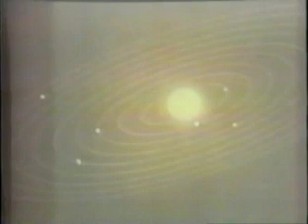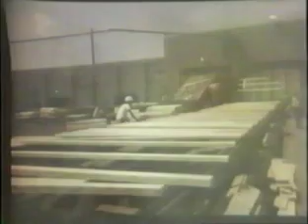Within the universe, we live in isolation. All space beyond the limits of this tiny planet is hostile to man. Apart from sunlight, we receive no help from outside. Unless we tap resources on other planets, we must make do with what we have in the world. And some of our resources, once used, cannot be renewed. We can cut trees for lumber, for paper, or for energy as firewood, and then reforest and cut again. But every lump of coal, every drop of oil, every puff of gas once burned is lost forever.

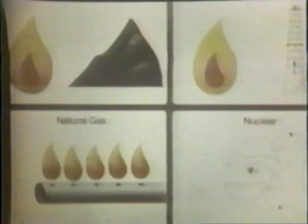Coal, oil, and gas, these are the traditional sources of energy, the so-called fossil fuels, and our isolated little planet contains only a limited amount of each. So far in our use of these fuels, it must be admitted that society has followed a deliberate policy of waste, a policy of maximum consumption, regardless of necessity, efficiency, or national priorities, a policy dictated by comfort, taste, profit, and expediency. We have become a throwaway society.

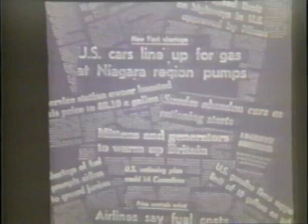Now the first signs of our foolishness, the first signs of the approaching depletion of these valuable resources are making themselves apparent. The headlines you see, you have also seen in newspapers: shortages, rationing, skyrocketing prices, Sunday driving bans, lower speed limits, lower thermostat settings, and so on.

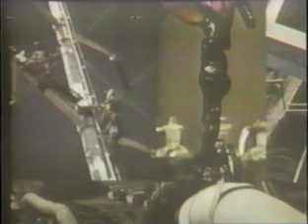What is the answer to the dilemma? Energy is woven through the whole fabric of our society. We cannot get along without it. What then will supply energy in the future in quantities at least as large as at present for the developed nations, and in much larger quantities for underdeveloped countries? Only one alternative source of energy has demonstrated that capability: nuclear power.

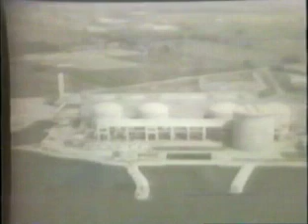That is the Pickering Nuclear Power Station. In capability, it's one of the world's largest. In terms of production, efficiency, and reliability, it is number one, and it is Canadian-designed, built and operated by Canadians, and serving Canadian electrical needs.

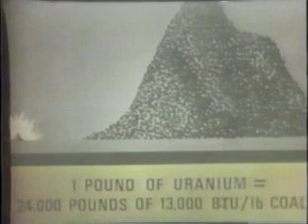To duplicate its output during 1973 with power from a fossil fuel station would have required 7.5 million tons of coal, or 1.1 billion gallons of oil, or 194 billion cubic feet of gas, because 1 pound of uranium fuel is equivalent to 24,000 pounds, or 12 tons, of coal.

Most Canadians have heard of the resounding success of Pickering, but because of its recent and sudden prominence in the news, some may have assumed that Canada is a relatively new arrival on the international nuclear scene. But that's not so. From the earliest days of nuclear development in the United States, Europe, and the United Kingdom, Canada has been involved. Ernest Rutherford, one of the fathers of modern-day nuclear physics, did much of his work at McGill University in Montreal during the early 1900s.

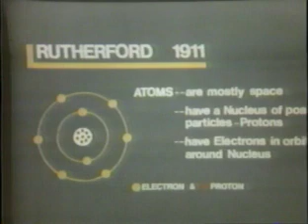He discovered many of the basic properties of radioactive elements, first postulated the structure of the atom as we know it today, and drew attention to, as he put it, the enormous amount of energy which could be obtained from a small amount of matter.

Later, during World War II, a nuclear research establishment was founded at Chalk River, Ontario. Its primary function was to carry on investigations, begun earlier in France, of nuclear reactions using natural uranium with a heavy water moderator. At the same time, a small plant was set up in Trail, British Columbia, to produce heavy water. During these war years, the first reactor in the world began operation in Chicago on December 2nd, 1942.

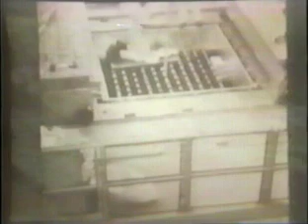Canada was the world's second nation to own and operate a nuclear reactor when the ZEEP reactor at Chalk River achieved a controlled chain reaction on September 5, 1945.

After the war, the research at Chalk River, still concentrating on the combination of natural uranium and heavy water, continued under the direction of the National Research Council until the newly formed Atomic Energy of Canada Limited took over in 1952.

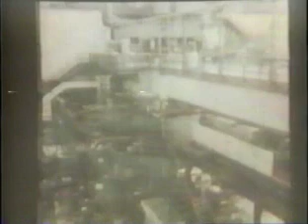ZEEP was followed by two additional research reactors at Chalk River, the NRX, which began operation in 1947, and the NRU in 1957. But for Canada, 1954 was a major turning point.

In that year, a decision was made to explore the possibility of using this new technology for the production of electricity. From that decision, we progressed to the demonstration plant, NPD, started up in 1962, to the prototype station, Douglas Point, in 1967, and to the large commercial Pickering plant in the 1970s. Each station 10 times the size of its predecessor.

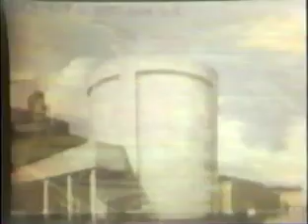Also brought online in the early 1970s was the Gentilly plant in Quebec, a prototype of another variant of the Canadian nuclear system, termed CANDU, for Canada Deuterium Uranium. Today in Canada there are 7 CANDU power reactors in operation and 19 others under construction or planned. All 26 reactors are centralized at 7 locations, and their combined electrical output would be equivalent to Canada's entire generating capability in 1955.

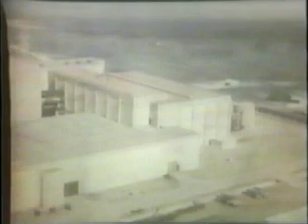Abroad, 2 research reactors and 5 power reactors have been sold, and all but 3 of the power reactors are now in operation. For many people, nuclear power, although an accepted reality, remains shrouded in mystery.

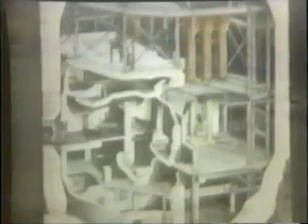A CANDU nuclear reactor is simply a type of furnace used to produce the high-pressure steam that rotates the turbine in windmill fashion and drives the generator to produce electricity. The fuel is natural uranium.

Unlike a coal, oil, or gas furnace, the heat does not come from the process of combustion. It comes from fission and is generated within the uranium itself by the continuous splitting of atoms, which raises the temperature of the fuel as high as 3,600 degrees Fahrenheit.

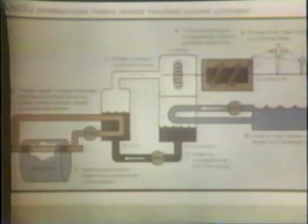An atom of any material, including uranium, is composed of a core or nucleus made up of a specific combination of protons and neutrons, around which a number of electrons move in an orbiting pattern, much as the planets move around the sun. When a uranium atom is struck by a free neutron, it splits into pieces which fly apart with great energy and create heat in collision with neighboring atoms.

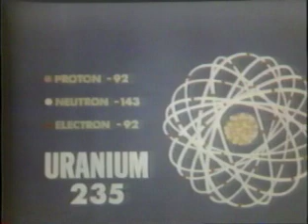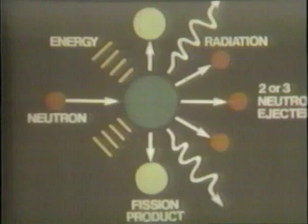Also at this moment of fission, radiation is given off and 2 or 3 free neutrons are released. In natural uranium, there is a small amount of spontaneous fissioning going on all the time, and from this natural process come the initial neutrons required to start the chain reaction.

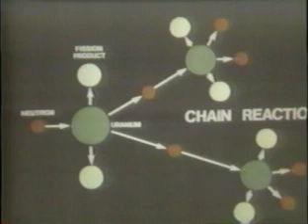The reason why the chain reaction occurs only when the fuel is in the reactor is because the reactor contains another essential ingredient, the moderator. As the 2 or 3 free neutrons are ejected from the splitting atom, they travel at great speed.

Much as a bullet must be slowed down before it will shatter rather than just make a hole in a pane of glass, so the neutron speed must be reduced or moderated to about a mile a second before they will readily split other uranium atoms.

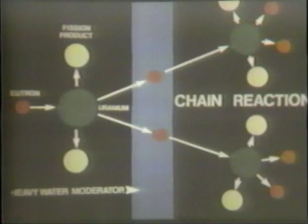Heavy water is the most efficient moderator known. It looks, tastes, and feels the same as ordinary or light water, but weighs about 10% more. The difference lies in the type of hydrogen atoms contained in each substance.

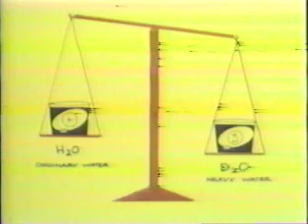Ordinary hydrogen and oxygen combine to form ordinary water, H2O. Heavy water, D2O, is a similar combination of heavy hydrogen, also called deuterium, and oxygen. The nucleus of ordinary hydrogen consists of 1 proton only, while heavy hydrogen has a nucleus of 1 proton and 1 neutron, and therein lies the extra weight.

Heavy water occurs naturally in our rivers, lakes, and oceans in the proportion of 1 part heavy water to 7,000 parts of light water. Here at Niagara Falls, for example, 320,000 gallons of heavy water pass over the falls each hour. There are 2 plants in Canada presently engaged in the extraction of heavy water, one at Port Hawkesbury, Nova Scotia, and the Bruce plant at Douglas Point, Ontario.

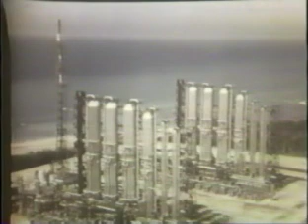Within the next few years, the Bruce complex will be expanded, and 2 new plants, one in Nova Scotia and one in Quebec, will be brought into production. It is the combination of heavy water moderator and natural uranium fuel that makes CANDU unique among the world's commercial power reactors.

Natural uranium is found in abundant quantities in Canada. The uranium compound is formed into pellets approximately 1 inch in length and about half an inch in diameter. During their 18-month stay in the reactor, each pellet produces enough electricity to supply the average home for about 3 months, and each reactor at Pickering contains over 3 million pellets.

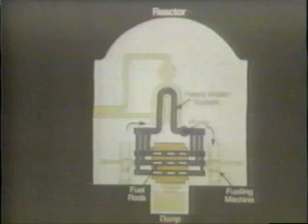They're sealed in metal tubes which are bundled together in groups of 28 and placed in the fuel channels that honeycomb the reactor. Outside the channels, the heavy water moderator, shown here in orange, fills the reactor. Inside the channels, a cooling fluid, also called a heat transport fluid, shown in blue, circulates and absorbs heat as it passes over the hot fuel bundles.

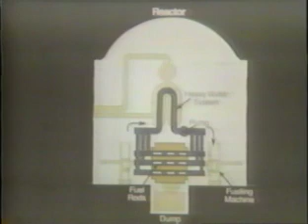In the Pickering reactors, the cooling fluid is heavy water. The fluid then moves on in a closed loop to the heat exchanger and then back to the reactor. As it passes through tubes in the heat exchanger, it gives up its heat to ordinary water, which is in turn converted to steam. This is the basic CANDU system, although there are other variations of it.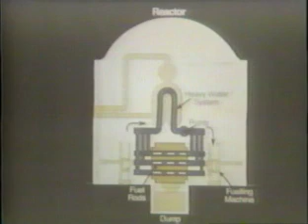It is referred to as a pressure tube system because the coolant fluid in the channels is kept under a pressure of over 1,200 pounds per square inch to prevent it from boiling.

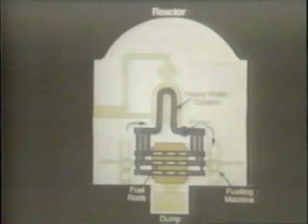Other types of reactors in common use around the world fall into two broad categories: gas-cooled and light-water reactors. They use a less efficient moderator—graphite for the gas-cooled and light water for the other—which means the fuel has to be enriched in uranium-235 content to sustain a chain reaction, an extremely expensive process.

A new type of reactor is under development in a number of other countries, principally the United States, Britain, Russia, and France. Termed the fast breeder reactor, it is fueled with a mixture of plutonium and uranium, and while it operates, it produces more fuel than it burns.

This is achieved by surrounding the core of the reactor with a non-fissionable type of uranium. Fast neutrons escaping from the edge of the core bombard the uranium and convert a substantial portion of it to a fissionable type of plutonium, which can be recycled back to the reactor as fuel. Fast breeders may be in commercial operation in the late 1980s.

The CANDU reactor is sometimes referred to as a near breeder. It produces some fissionable plutonium, but not in large enough quantities to be self-supporting for fuel. Future variants of the CANDU system are expected to complement rather than compete with the fast breeders.

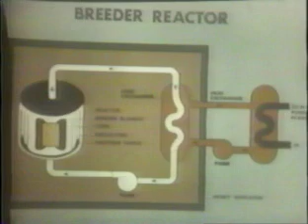However, until breeders are a proven technology and are in commercial operation in large numbers, it must be remembered that supplies of uranium are not limitless and they can be depleted. And herein lies one of the important advantages of the CANDU system: it uses less uranium to produce a given amount of energy than any other established reactor system in the world today. For example, compared to light water reactors, it can produce twice as much energy per pound of uranium.

What we are witnessing today is another stage in the evolution of society's energy base. In 1850, about 90% of our energy was derived from wood. 50 years later, at the turn of the century, coal was the dominant source of energy, accounting for over 70% of the total. Over the next 50 years, by 1950, oil and natural gas had moved into the lead, supplying more than 50% of our energy needs. Now that percentage has continued to grow until today it stands at about 75%.

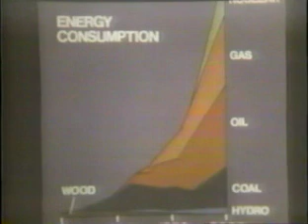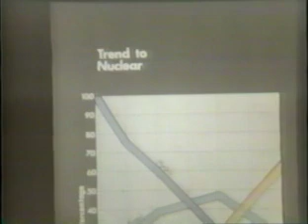But the signs of their decline appear all around us. In the meantime, nuclear energy appeared on the scene in the 1950s, became established in the 60s, and now is steadily increasing its contribution to the energy pool each year. The conclusion is inescapable: nuclear energy is here to stay, and in the not-too-distant future it will be the dominant source of electric energy. The natural question then is, what will it be like to live with?

Is it safe? How will it affect our environment? It's not possible in the time available to give the subject of nuclear safety the treatment it deserves. That would have to be the subject of a separate presentation. However, I will attempt to provide a rough overview without which a general discussion on nuclear power would be incomplete.

To begin with, some people wonder about the possibility of a nuclear explosion occurring at a nuclear power plant. Let me assure you, this is impossible. It cannot happen. None of the conditions necessary for a nuclear explosion are present in a power reactor.

As to the general question of safety, there has never before been a technology subjected to such stringent safety measures. Simply put, serious accidents have never had the opportunity to occur in a commercial reactor. As a result, the industry today enjoys a safety record unsurpassed by any other.

In Canada, the Atomic Energy Control Board is charged with the responsibility of setting and enforcing the restrictions within which the industry operates. The AECB standards are based on the expertise of an independent international body of prominent scientists, the International Commission on Radiological Protection.

The AECB's concern is many-faceted and covers the entire spectrum of siting, design, construction, and operation. Each of these stages is scrutinized in detail by the board, and their rigid standards must be met before the next stage is permitted to proceed.

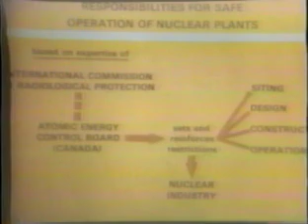The vacuum building has a large dousing tank of water at roof level, and as its name implies, is kept at close to a perfect vacuum. In the unlikely event that the most serious, hypothetically possible accident, a rupture of one of the main heat transfer pipes, should occur, steam from the reactor building would be sucked into the vacuum building and condensed by a water spray system from the roof reservoir.

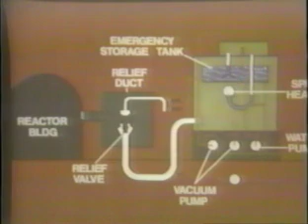Other safety measures include triplicated protective systems, filters in the air conditioning systems, duplicate backup equipment, and a continuous training program for all personnel. Supervisory personnel must pass stiff qualifying exams set by the AECB.

After about 1.5 or 2 years in the reactor, radioactive spent fuel is removed and stored in underwater bays located in the power station. The bays look like swimming pools about 20 feet deep. They can hold about 10 years' supply of spent fuel from the station's reactors. Eventually, the fuel will be removed and stored in buildings designed particularly for that purpose, and perhaps even later underground.

At specially managed and monitored sites, other radioactive wastes are either stored safely or destroyed, depending on their level of radioactivity and their composition. Actually, there's nothing new about radiation. It's as old as time.

Man has always been subjected every day of his life to radiation from outer space in the form of cosmic rays, from the soil, rocks, concrete, bricks, and other building materials around us, even from other people, for man himself is radioactive to a certain degree. In total, this is referred to as background radiation, and it varies from place to place with the local geology and the altitude.

In fact, a person would have to live on the boundary of a nuclear station for a year before he would be exposed to as much radiation as one would receive from cosmic sources during a transcontinental return air flight. The permissible levels of radiation for the general public are conservatively set by the AECB at 4 or 5 times the average level of background radiation.

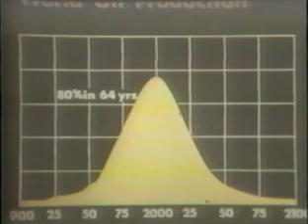For example, the world's leading experts forecast that the production of oil will peak sometime in the next 25 years and then decline until 60 years from now. Only 10% of the original reserves will remain, and these forecasts make allowance for future discoveries. Conservation of the remaining reserves is imperative when we consider their other uses as an irreplaceable source of hydrocarbons, to name a few: transportation, lubrication, asphalt paving, roofing, plastics, insecticides, and synthetic fibers for fabrics.

Another beneficial side effect of nuclear power, one which I mentioned earlier, is improvement in the quality of life by reducing air pollution. All of these things considered, it's not surprising that a world consensus has developed that nuclear power has arrived just in the nick of time.